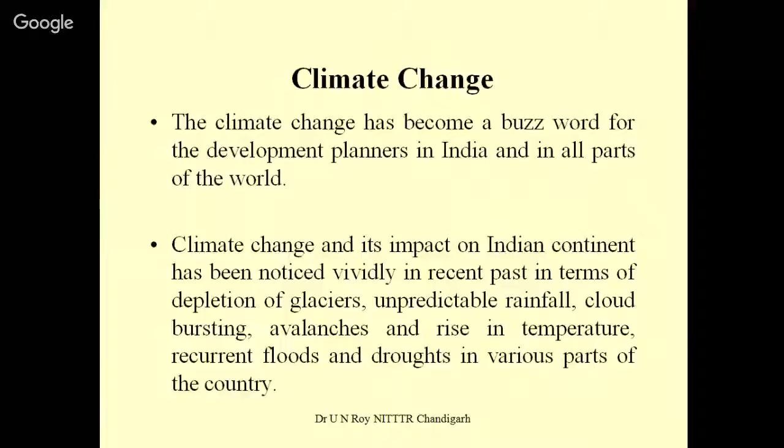And if climate change is there, then its various impacts are going to increase the frequency, intensity, and duration of droughts. All over the world this impact may be visible, and with this impact, so many sectors, particularly food, water, and energy, may face some crisis. We are passing through such crisis. And if there is climate change, it will have an inverse or bad impact on our food grain production. If the temperature increases, some crops may not grow. If the temperature goes down, some crops may be damaged. So such kind of situation is there.

Then water scarcity - as you know, most planners say the next world war will happen over water. Due to the scarcity of water, we are facing a lot of crisis, and similarly we have an energy crisis. This was projected by the Secretary General of the World Meteorological Organization a few years back. But what is the situation throughout the world?

There are two schools of thought. One group of geologists or environmentalists talk that global warming is taking place, and a second group of scientists say that global cooling is taking place. So who is correct - whether global warming is taking place or global cooling? Because the geological cycle takes millions of years into account, over the years, as per the geological cycle, there has been some period of global cooling and some period of global warming. This situation prevailed on the earth for years, and due to that cycle, some geologists still believe that after millions or thousands of years, once again global cooling will take place. But the people who believe in global cooling are very few in number.

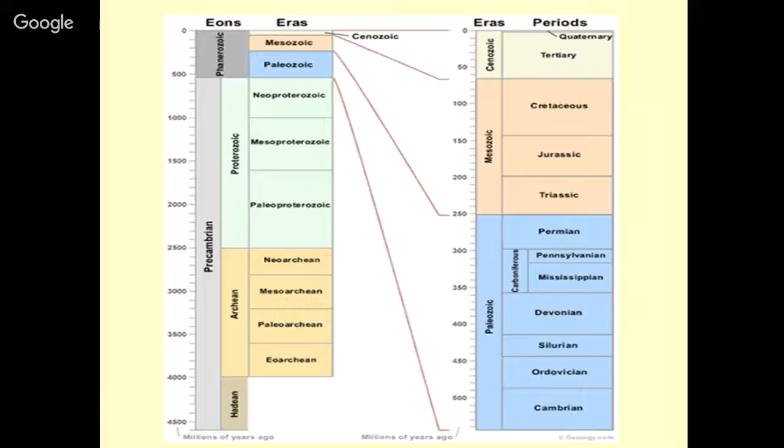So what was such situation? We have to learn about that. So geologists think in the millions of years of scale.

So you can see that 10,000 years ago, what was the situation? 1.8 million years ago, there was some different situation on the earth, and likewise the development or the evolution has taken place. So this evolution is important to learn, and there are various ages, and gradually different species, different plants and animals grew. They evolved gradually.

So earlier the microorganisms, small species were there. Gradually the bigger organisms, highest class of species and plants and animals came. And gradually such development has taken place on the earth, and it has a millions of years of scale.

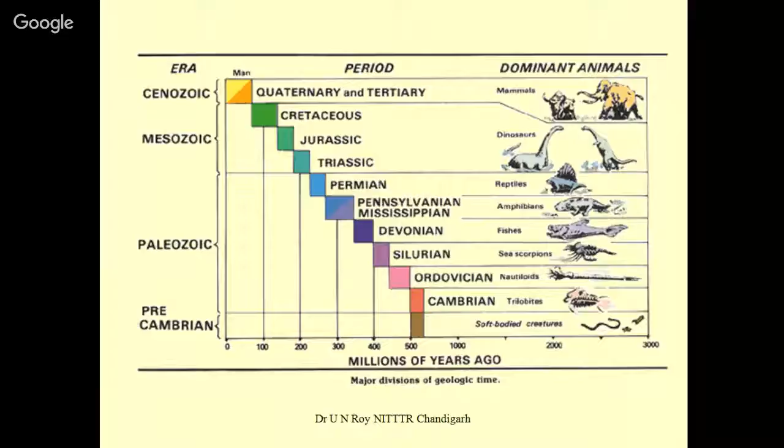That's why the geologists do not think that global warming is taking place, and they say we have to take the millions of years into account. So there may be a situation, maybe after 1 million years, once again there may be an ice age.

तो आप देखिए कि बीच बीच में ये ice age आते रहे हैं, इसलिए जियोलॉजिस्ट जब भी बात करेंगे तो कभी ये नहीं कहते कि भाई ग्लोबल वार्मिंग हो रही है। हो सकता है 1 मिलियन ईयर्स के बाद फिर से ग्लोबल कूलिंग हो जाएगी। अभी 20-25 दिन पहले आपने एक न्यूज पढ़ी होगी कि गंगोत्री के ग्लेशियर्स बढ़ गए हैं, so there may be a microclimatic change in that particular region, and the glaciers has increased, expanded। वहां पे आइस ज्यादा फॉर्म हुए। तो ये भी एक थॉट है जिसको आपको ध्यान में रखने की जरूरत है।

एंड देयर इज अ डिफरेंस बिटवीन क्लाइमेट एंड वेदर। क्लाइमेट जो है वो थाउजेंड्स ऑफ ईयर्स ऑफ स्केल पे डिपेंड करता है, वो लॉन्ग टर्म फेनोमेना है, एंड वेदर इज अ शॉर्ट टर्म फेनोमेना। तो हम जो मौसम की बात करते हैं वो वेदर की बात करते हैं, जो बीच बीच में डिस्टर्ब होता रहता है। व्हेनएवर वी टॉक अबाउट द टेम्परेचर, व्हेन वी टॉक अबाउट द रेनफॉल, हम बात करते हैं वेदर की, मौसम की बात करते हैं। लेकिन जलवायु की बात हम थाउजेंड्स ऑफ ईयर्स के स्केल में करेंगे। वे ग्रेजुअल चेंज है, ये 1-2 दिन की बात नहीं है। जैसे जैसे ये सिचुएशन चेंज होगी, पिछले 100 सालों में जो हमने गलतियां की हैं उसके कारण जो चेंज आएगा उसको हम क्लाइमेट चेंज कह सकते हैं, वेदर चेंज नहीं कहेंगे। वेदर चेंज इज द शॉर्ट फेनोमेना, 15-20 दिनों में, 50 दिनों में जो भी डेवलपमेंट हो रही है उसको हम वेदर से रिलेटेड डेवलपमेंट कहेंगे। सो वी कैन अंडरस्टैंड देयर इज अ डिफरेंस बिटवीन क्लाइमेट एंड वेदर।

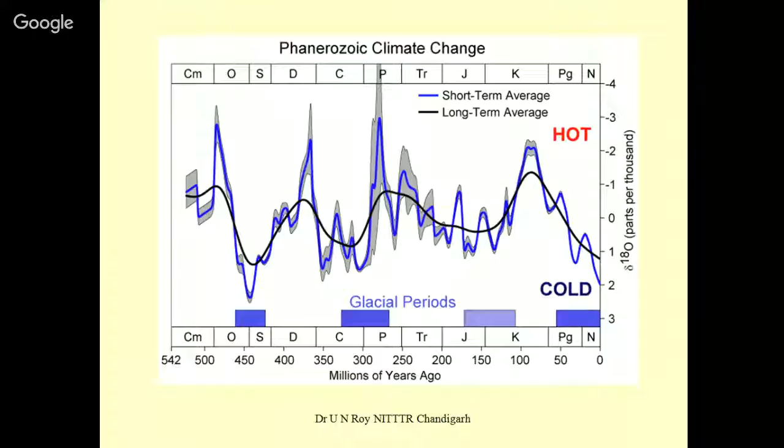सो व्हाट आर द कॉजेज ऑफ ग्लोबल वार्मिंग? एवरीबॉडी नोज, इवन आवर चिल्ड्रन नोज व्हाट वी हैव बीन डूइंग। हमने पूरे ग्लोब पर तरह तरह की डेवलपमेंट की एक्टिविटीज की। हमने जंगलों को काटा, हमने रोड बना दिए, हमने इंडस्ट्रीज खड़े कर दिए, हमने तरह तरह की पोल्यूशन व्हीकल्स ले आए। So with the development, pollution level is also increasing. So side by side, pollution graph is also going up, and similarly the graph of the pollution is also increasing.

So due to anthropogenic activities, anthropogenic means created by humans, done by humans, such anthropogenic activities are contributing to global disturbance, to increase in temperature. So major cause for such changes are anthropogenic. We human beings on the planet earth are responsible for this. Whatever development has taken place, it is all at the cost of natural degradation. So we should know what kind of damage we are doing, whether we are going to develop any machinery, any development activity, whether we are going to construct a dam, we have to damage some part of the nature, we have to use some part of natural resources. So due to all such activities in the last 1 century, lot of changes has been made, and these changes are contributing to global warming.

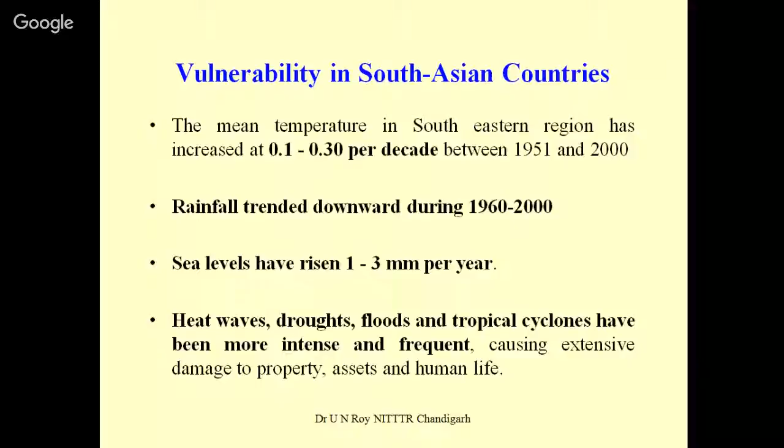So in some parts we are facing heat waves, droughts, floods and tropical cyclones. That kind of feature may become a regular feature in South Asian countries. As you know, we are surrounded by the sea from 3 sides, so we face all the problems in the sea region, and sometimes we have cyclones, tropical cyclones. They create problems and may cause damage to our property, assets and human life, what we call disaster. So vulnerability in South Asian countries is more.

It has been projected that between 1990 and 2100, the annual mean temperature is projected to rise by 4.8 degrees centigrade. Can you imagine, by 2100 if it goes up to 4.8 degrees centigrade, then what will happen? A lot of glaciers will melt down, and countries like Maldives, Kiribati, Norway, Sweden, Japan, and even some parts of our country will get submerged into the sea.

Sea level will rise, meaning many parts, many islands, small islands, are going to be submerged. Like Maldives, it is a very, very vulnerable group of islands, so the people from there may be evacuated.

There is a small island in the Pacific Ocean named Kiribati. The highest point on that particular land is 8 meters, so it's a very, very flat island located in the Pacific Sea, and it is very vulnerable. There are about 1 lakh population in that country, and it has been decided that they are going to be rehabilitated, evacuated from this place, and resettled in Australia and some nearby countries. That kind of situation is already prevailing.

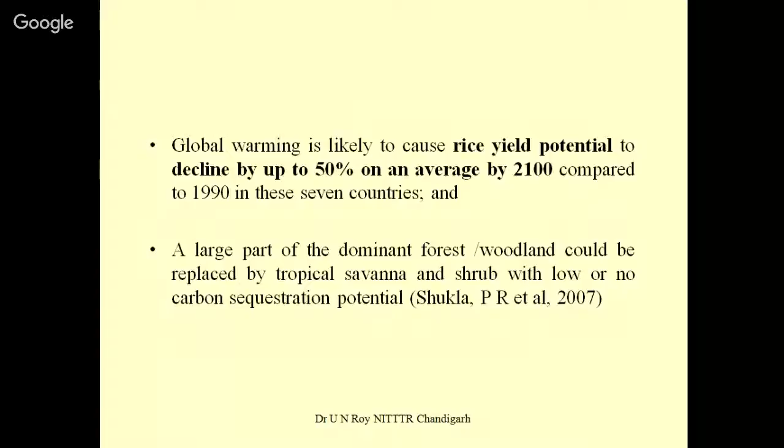In India, what kind of problems are we facing? We have a problem of earthquakes in 60% of our land mass. Then there may be a flood in 40 million hectares of our land.

Then the drought situation is prevailing in 68%. So you can see drought is the major problem in the southern part, central part, and eastern and western part as well. So drought is the major common feature across the whole country.

The second important problem is the earthquake. 60% of our land mass is prone to earthquakes. But some of the earthquakes which are devastating in nature may be above 5 or above 6 on the Richter scale. But you know, on the earth, there may be thousands of earthquakes taking place every day.

Those which are of damaging nature, more than 6 on the Richter scale, are very few in number. They occur 1 or 2 in a year, or maybe 5 or 6 in a year throughout the globe, and some go for even more than 8. So earthquakes are a very, very common feature.

Every day, thousands of earthquakes take place inside the earth, but they are not visible. We are not able to gauge them because they are of very low intensity.

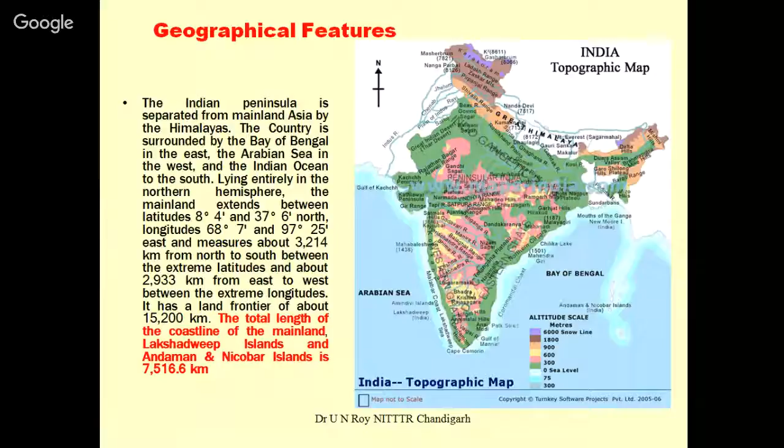हिंदुस्तान में 2004 तक कोई बड़ी प्लानिंग नहीं थी, लेकिन 2004 में जब सुनामी आई, तब हमने अपने laws develop किए। So now there is a 2005 Disaster Management Act that has been passed in the country. Before that, we were not much worried, and we were not putting more attention to disaster management. But after 2005, we have developed a Disaster Management Act, a plan, and in 2016 we have a full plan for the next 15 years। अगले 15 साल के लिए हम लोगों ने एक डिजास्टर मैनेजमेंट प्लान बनाया है, उसके बारे में भी हम डिस्कस करेंगे।

Now I am going to debate an issue. Are Himalayan glaciers melting, or is the river like Ganga going to dry up after some years? क्या हमारी गंगा जैसी जो नदी है वो कुछ सालों में सूख जाएगी? So this is a debate, a question which I am going to deal with. Everybody talks about the glaciers melting, but whether it will result in the drying of the river like Ganga. The Ganga is a perennial river, as you know, सालों भर ये चलती है, सालों भर इसमें पानी होता है। They are perennial in nature. But the question is that some scientists or some people are raising this issue of whether Ganga will dry or not. What is going to happen?

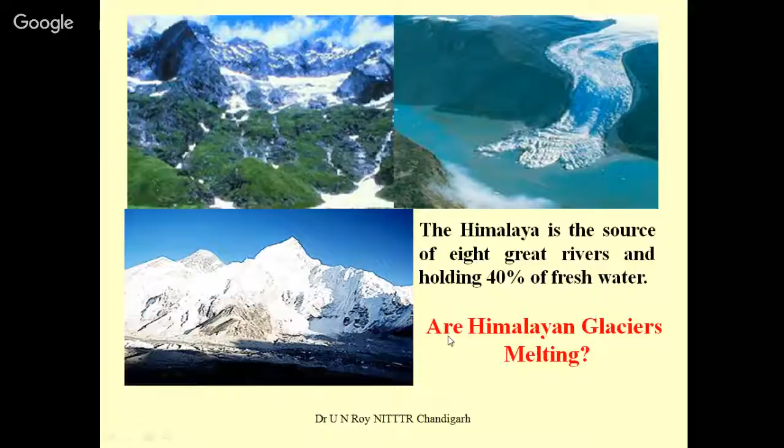So now let us talk about whether the Himalayan glaciers are melting. So can you see the figures? They all show that glaciers are melting. So the answer is yes, all such glaciers are melting, their size is decreasing, or in another term, we say it is retreating, going back and back. It is only visible on the top of the mountains now; earlier it was visible even below the mountains. Gradually, due to the decline or melting of glaciers caused by the increase in temperature, these glaciers have melted and are melting. So it will have some impact on the perennial rivers.

So glaciers are melting. Various studies conducted on the glaciers also suggest that most of them are melting. In one study conducted between 1980 and 1990, they took a sample of 612 glaciers. How many glaciers are there in the Himalayan and Tibetan regions, China and Indian regions? There are about 20,000 small and bigger glaciers. So this study, with a sample of 612 glaciers, suggested that 95% of such glaciers were found melting, found decreasing. A similar study conducted between 1990 and 2005 also reported that in 95% of cases glaciers are melting। तो एक बात साफ नजर आती है कि ग्लेशियर्स मेल्ट कर रहे हैं और डिफरेंट स्टडीज इसको सजेस्ट कर रही हैं।

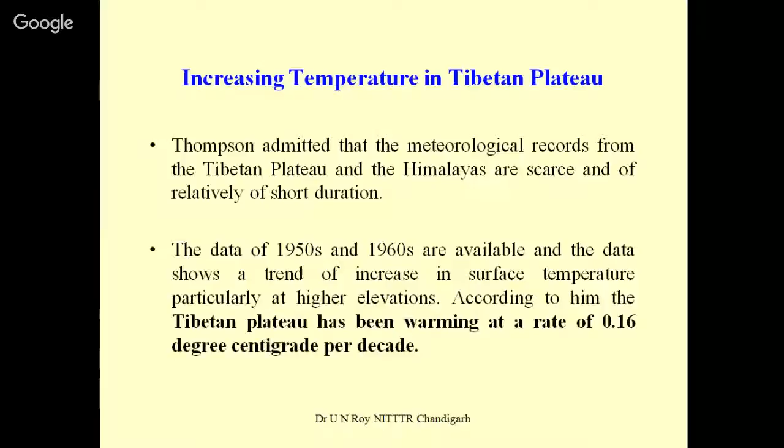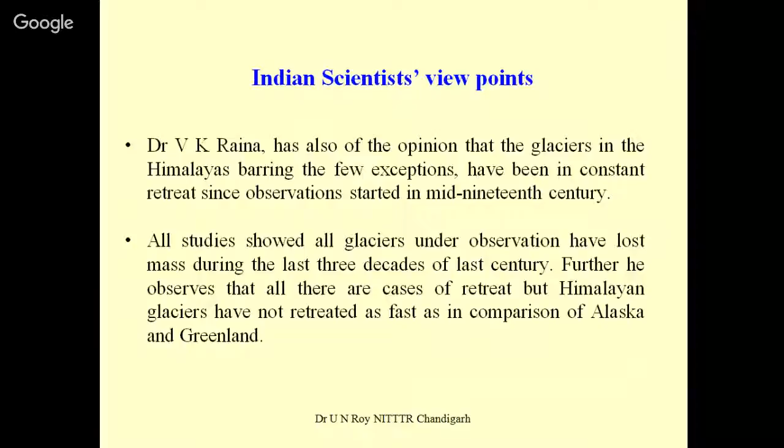As I was talking about, there are about 20,000 glaciers in India, China and the upper Himalayan regions, and most reports say that glaciers are melting. A number of scholars who have studied problems related to glaciers suggest that the glaciers are really melting - that is the conclusion. So let us conclude that most of these things are there. But I raised the issue of whether the river Ganga is going to dry up if the glaciers are melting.

What do you say? Let me ask this question to our students sitting in the studio. What do you say - will the Ganga dry up after some time if the glaciers are melting at a very fast rate? What will happen? What do you think on the other side also? Will the Ganga dry up?

According to study, it says... most of our participants say that the Ganga may dry up, based on what we see of the rate of depletion of glaciers. So according to that rate, the Ganga may get dried. But some scientists have concluded, based on some studies, that the contribution of Ganga water is more from the rain.

70 to 75% of the water coming into the river Ganga is from rain, from the different bigger catchment areas in the Himalayas. So all the rain water makes it more perennial in comparison to the ice water or glacier water. So it was concluded, based on that study, that still 75% or 70% of the contribution will come from the rain.

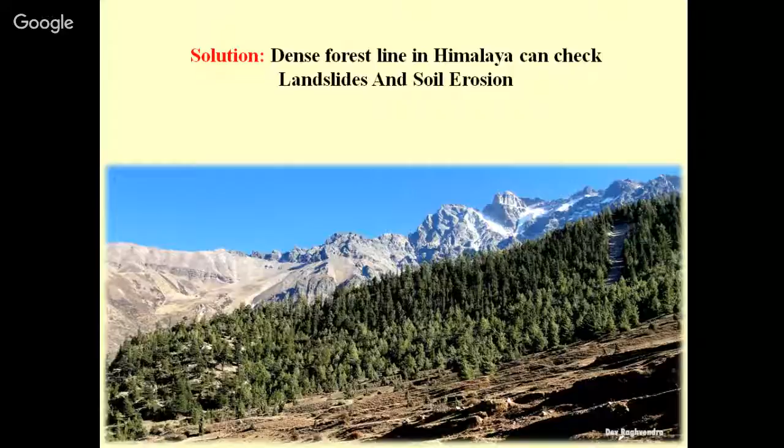एंड ही हैज डेवलप्ड अ मिक्स्ड फॉरेस्ट इन हिज विलेज इटसेल्फ. तो उनसे हम सुनेंगे कि फॉरेस्ट को बचाना कितना जरूरी है अगर हम ग्लेशियर्स को बचाना चाहते हैं. सो दे आर वर्किंग एज अ सेफ्टी बेल्ट. तो ये बात हमें समझने की जरूरत है.

So there will be a lot of problems if this continues, and due to climate change the food security issue will be the major issue. फूड सिक्योरिटी की सबसे भारी समस्या हमारे पास आएगी और 75% एरिया में फूड क्रॉप्स कुछ ना कुछ तरह से अफेक्टेड होंगे, और इसपे सबसे बड़ा चैलेंज फार्मर्स को झेलना पड़ेगा. फार्मर्स आर गोइंग टू बी मोर अफेक्टेड ड्यू टू द क्लाइमेट चेंज एंड फूड सिक्योरिटी प्रॉब्लम होने वाली है. और पिछले 100 सालों में जितनी भी क्रॉप्स थे हमारे पास, धीरे धीरे 5-6 छोड़कर

75% जो फूड क्रॉप्स थे सब खत्म कर दिए. ओनली वी आर डिपेंडेंट ऑन फ्यू क्रॉप्स दीस डेज - ओनली राइस, पोटैटो, मेज, व्हीट. So only a few crops are available. Other crops have been damaged due to modern agriculture. We have stopped growing small crops like millets, oil seeds, and all such crops we have lost.

अब अगर गांव में आप फार्मर्स के पास जाएंगे, उनके पास बीज ही नहीं है क्योंकि वो धीरे धीरे बाहरी दुनिया पे डिपेंडेंट हो गए. पहले वो बीज खुद तैयार करके रखते थे, अब धीरे धीरे उनके पास सारे बीज खत्म हैं. सो दैट इज अ मेजर प्रॉब्लम विच द फार्मर्स आर गोइंग टू फेस.

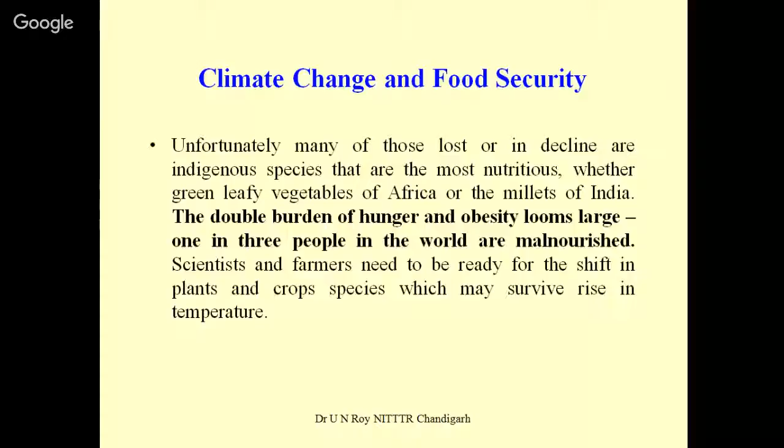Food crisis may occur, so it will change to hunger and obesity. And India is facing two kinds of problems. शहरों में 1/3 लोग खा कर इतने मोटे हैं, they are facing obesity. They are facing another problem - or 1/4 of our population, 25%, they are facing the problem of hunger and all such things. So this is the situation prevailing in our country.

Now, in order to mitigate the climate change issue, Government of India has set up 8 missions. हिंदुस्तान ने क्लाइमेट चेंज को टैकल करने के लिए जून 2008 में 8 मिशन बनाए हैं. क्या क्या मिशन है? First is the National Solar Mission - let us go for more and more renewable energy resources. Our Prime Minister has advocated a lot, and many solar power plants are coming in Gujarat, Rajasthan, Maharashtra, and various other parts of the country. So national solar mission is one.

Second is the National Mission on Enhanced Energy Efficiency. So we have to make all our technology energy efficient. Gradually we are taking various measures - CFL bulbs have come, LED and small equipment has come which is less energy intensive; earlier it was high energy intensive. So we are trying to save energy by making it more efficient. Even in thermal power plants there is a loss - from the thermal power plant, when electricity comes to different houses and localities, about 30% loss is there. So can we minimize such losses?

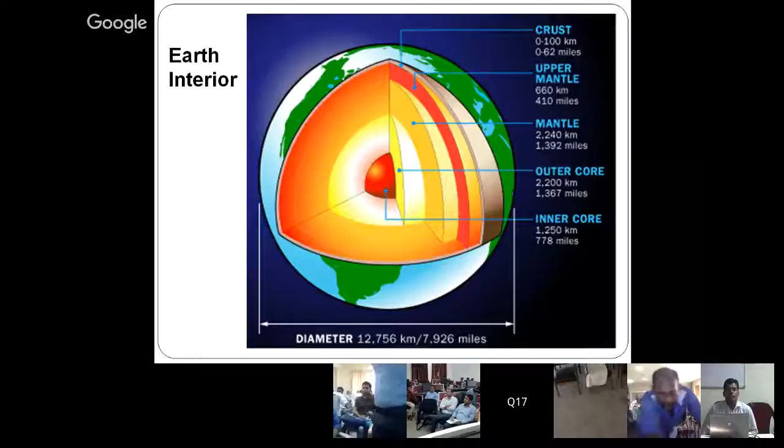So first, this is the Earth's interior look. As of now, if you look at the Earth exteriorly, we can say our Earth is simple and unique, and integrated with each other, right? That's perfectly right. But when you look at the interior part of the Earth, you can see the inner core, outer core, mantle, upper mantle, and crust. Crust is the region where we actually are. The inner core is in solid form, and the outer core is in liquid form. The remaining parts are composed of sand and rocks.

So at the crust, Earth has 4 major layers: inner core, outer core, mantle, and crust. Crust is the region where we actually are. The crust and the top of the mantle make up the thin skin on the surface of the planet. This skin is known as tectonic plates. Tectonic plates are nothing but a plate-like form made of rock materials—directly, it's rocky material. Just imagine below the mantle, exactly near the mantle, we have many rocky surfaces. Like when you have water and you float leaves on it, how they float—similarly, these tectonic plates exist on our Earth's surface, exactly below the mantle surface.

These tectonic plates are not continuous plates. Before 1900, we used to think these tectonic plates were continuous. But later, after 1920 and after 1960, we finally concluded in the year 1960 that these tectonic plates are not continuous plates—they are broken plates. Broken plates means it's not a continuous plate, it is broken. Just imagine when you have a cup of water with many broken leaves floating on it—they are not in an ideal fixed position. The same kind of thing is happening internally on the Earth's surface.

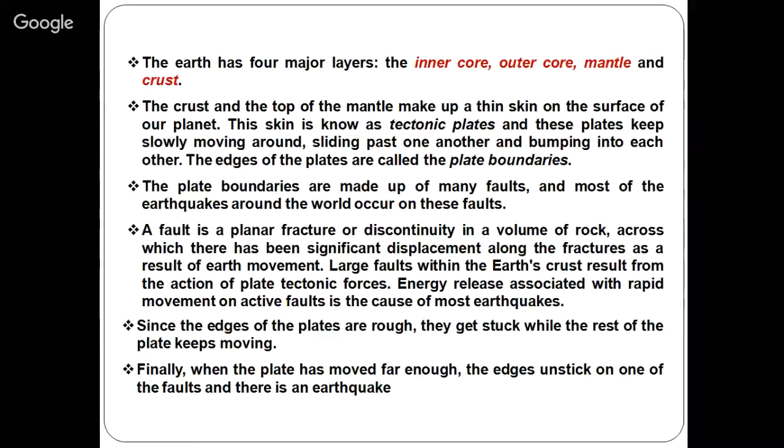That's why it is generally referred to as one of the very active seismic regions. That particular Himalayan region is generally referred to as a very active earthquake region. That's why we used to have many earthquakes in those regions, because when 2 plates are merging or colliding with each other, we can expect some earthquakes.

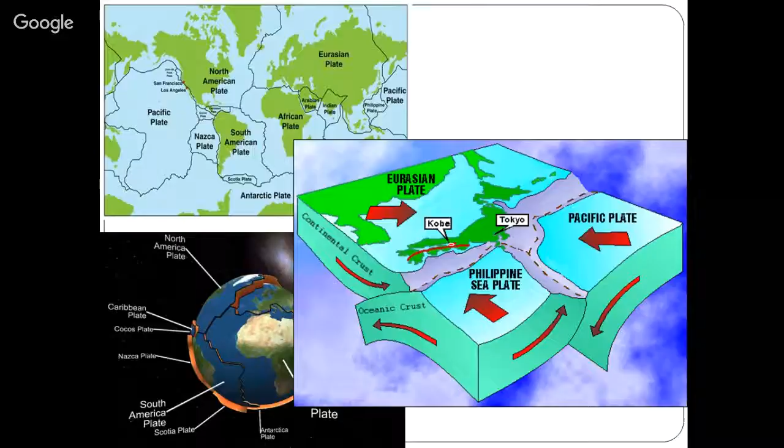Earthquake. It's not a bad thing, first of all. It's a very good one. It's nothing but the releasing of sudden energy.

Humans are living on the crust, which is the uppermost part of the Earth. So we think that earthquakes will kill us. No, an earthquake is not going to kill you or me. The building which we are constructing on the earth's surface will kill us. So we have to construct our buildings to be earthquake resistant, so that we can resist a certain amount of earthquake using modern advanced techniques and easily survive during an earthquake.

So an earthquake basically, as I told you, happens when 2 tectonic plates hit each other, and there you can expect a certain amount of vibration. This vibration is released in the form of energy, because tectonic plates are rocky materials, and rocky material is an elastic material. These elastic materials store elastic energy internally. When 2 plates hit each other, this stored elastic energy comes out from the surface, from the internal part of the Earth.

That point is generally referred to as the focus. Tectonic plates are rocky surfaces, but they're not always rigid. In some parts of the rocky surface, we can expect a certain amount of discontinuity in the continuous mass. This discontinuity is generally referred to as a fault, which is the weakest part of any tectonic plate. So when an earthquake occurs, we can expect it exactly in the fault region.

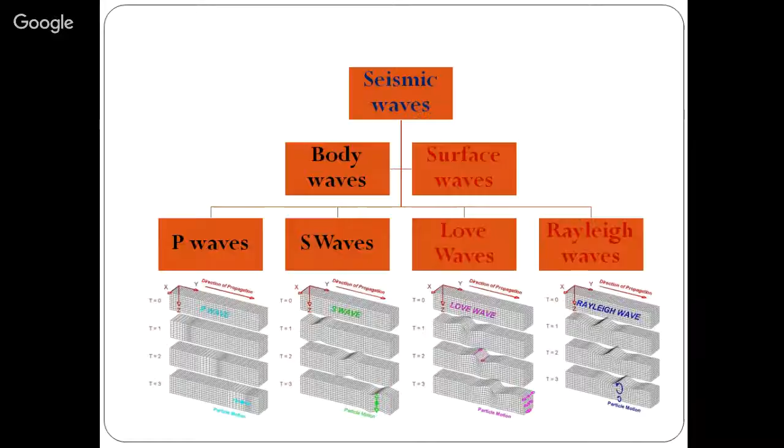These two waves are very strong waves compared with body waves, because body waves easily dissipate, but love waves and Rayleigh waves travel on the surface of the earth. That's why these two waves are the major source of disaster on the surface of the earth, whereas body waves are not. You can see the first picture stands for the primary wave or P wave. This will travel like this.

No, it will travel on the surface only, not in the internal part, only on the surface. That is the harmful one, yes. Love wave and Rayleigh wave are the harmful waves.

The next one, B, you can see the secondary waves. When you have a rope and you play with it like this, the rope travels in a wave form. This is the way S waves travel at the Earth's surface. Internally, these are the interior waves, the body waves.

Whereas in C, it travels in a zigzag form, and in D, it travels in a wave form plus it squeezes. That's why the Rayleigh wave is one of the strongest and most disastrous waves, creating huge disaster on the surface compared with any other waves. Primary waves are the fastest wave, but the Rayleigh wave is one of the strongest waves which create huge disaster on the surface.

So how do we measure these things? We have two different kinds of measurement for earthquakes: one is magnitude, another is intensity. Magnitude is measured in terms of the Richter scale, whereas intensity is measured in terms of the modified Mercalli intensity scale. There are two different scales we have. So what is magnitude actually?

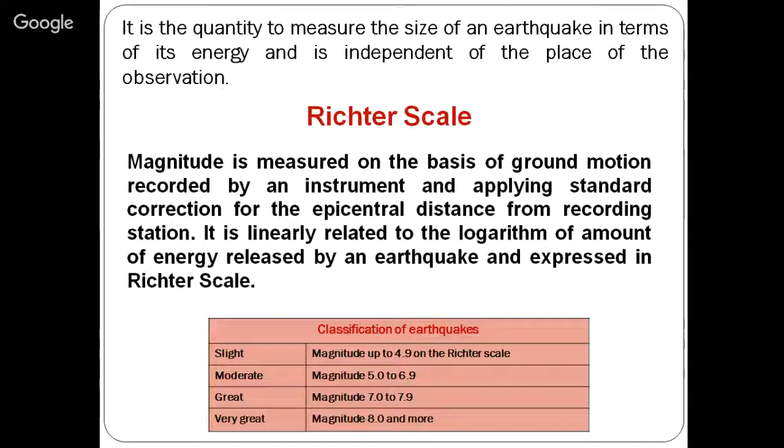Now let us see the Modified Mercalli scale, which talks about intensity. What is intensity? It is nothing but the amount of disaster we face. When an earthquake occurs exactly in Chandigarh, the buildings constructed on the earth's surface there will be collapsed or damaged. This damage level is the intensity - the amount of disaster, the damaged portions, and how the structure is damaged.

According to these damage levels, we have created a scale generally referred to as the Modified Mercalli Intensity scale, or MMI scale, ranging from 1 to 12. 1 stands for not felt by people, whereas 12 stands for huge or total damage. So if an earthquake occurs at Chandigarh with magnitude 7, even measured in America the magnitude remains 7 - it doesn't change, but the intensity will differ. In America the intensity might be 1, whereas in Chandigarh the intensity could be 12. That is the difference between intensity and magnitude.

What is the difference between zone and grade? Grade is nothing but a scale - grade number 1, grade number 2, grade number 3, like scale 1, 2, 3, 4, ranging from 1 to 12. Zone is completely different from that.

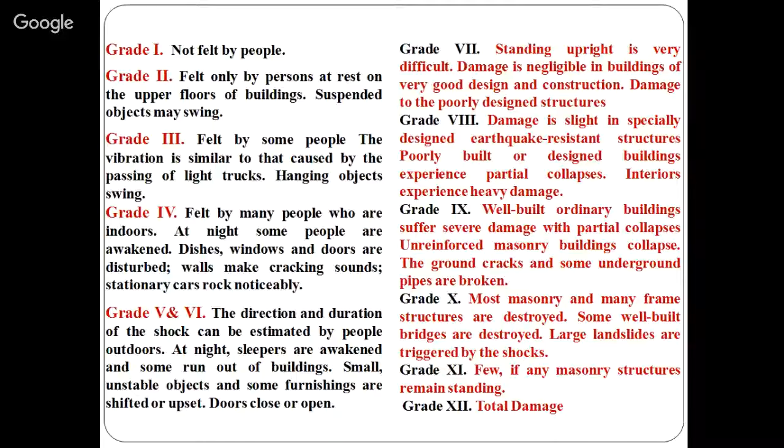Seismographs are among the oldest equipment used to monitor or observe the amount of earthquake energy released, in terms of acceleration, velocity, or displacement. Right now we have very advanced equipment, which is the same concept but in an advanced form - instead of the weight and pen, we have an automatic pen that is always moving, with a rotating drum at the bottom.

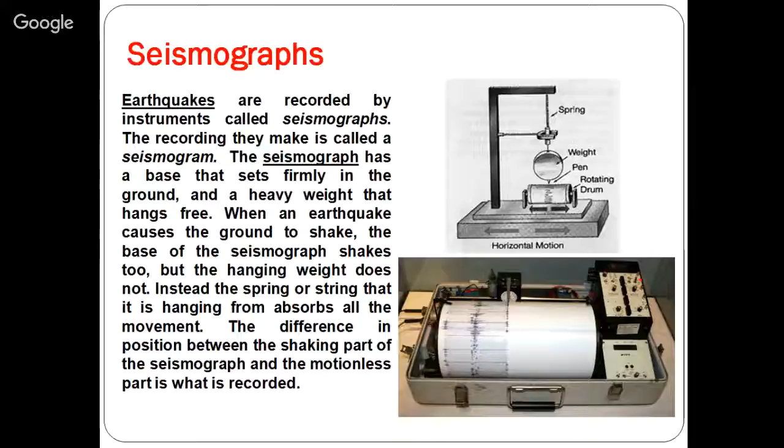Now, even this machine is not commonly used anymore. We have accelerographs that directly record the acceleration, velocity, or displacement of a particular earthquake. With the older machines, we had to get the graph separately and analyze it, whereas in the recent advanced equipment, we can easily measure acceleration, velocity, or displacement directly during an earthquake.

Seismic stations will not be on the Earth's surface; they will be 10, 20, or 30 feet below the surface, because this equipment is very sensitive. Even if you speak, jump, or travel with a vehicle on the surface, it will record all the vibrations. That's why we keep seismic stations below the ground surface.

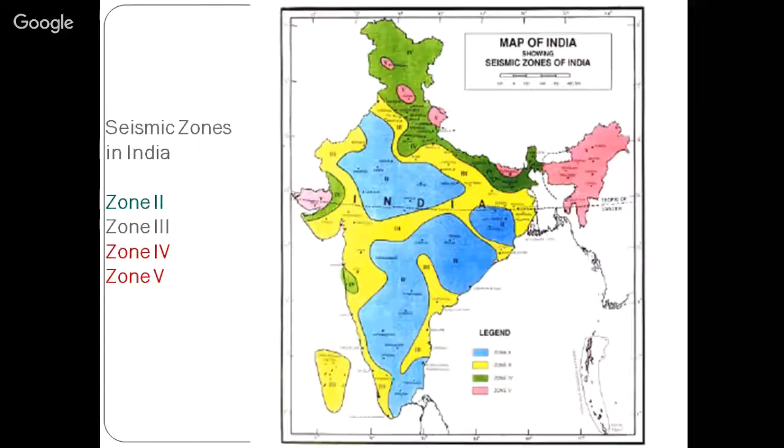What are the effects of earthquakes? You can expect landslides, surface faulting, tsunamis, liquefaction, and flash floods. If an earthquake occurs on the surface, we call that an earthquake. If it occurs below the sea, that is generally referred to as a tsunami.

An earthquake is nothing but a sudden release of energy. If that sudden release of energy happens below the ocean, the water present on the sea surface has to absorb the energy and dissipate it, and that happens exactly at sea level. At the midpoint of the sea, the depth is very large compared to the shore level, which is why there's no sign of wave movement during an earthquake occurring below the sea surface.

The tsunami will create huge disaster exactly at the shore level, not at the internal level, because the depth in the sea in the middle is much larger compared with the shore level. That's why the shore level depth is not sufficient to hold the energy released during an earthquake. That's why it dissipates like this, and we can expect tidal waves up to 10-meter or 20-meter height. That is nothing but the stored energy, released energy. The wave is traveling, the tidal waves travel to a height of 10 or 20 meters - but actually the waves themselves are not traveling that far; it's the released energy causing the tidal wave to rise to that height.

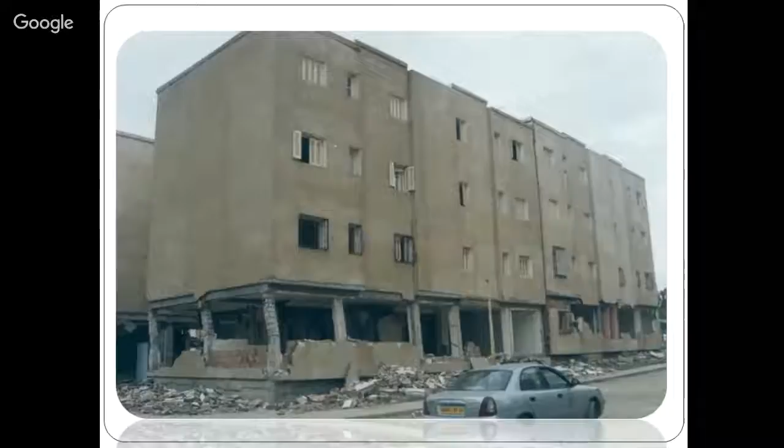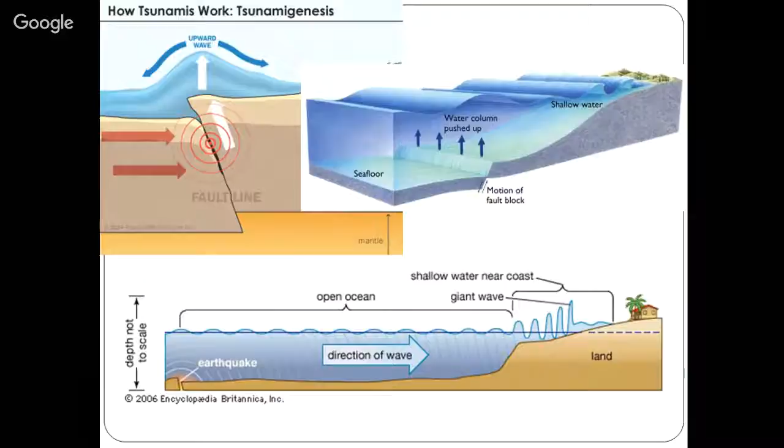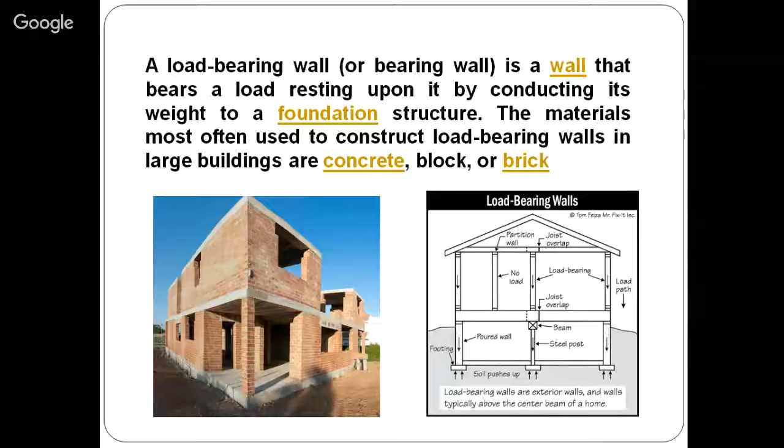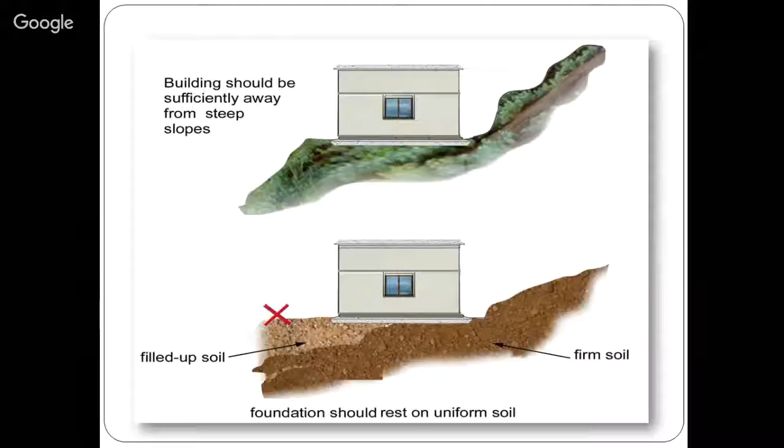So what are the things we can do? Earthquake resistant measures at the planning stage. It should start from the planning stage. If you have a solid surface, we can execute the construction immediately from the foundation. Suppose your foundation level is not solid, and you are filling with soil, filled up soil, then our foundation should not be on the filled up soil. The reason is an existing firm soil has very good consolidation compared with filled up soil, so you can't match the consolidation level of firm soil using filled up soil. In such circumstances, you can go for raft or pile foundations, because we need pile foundation only in filled up soil, whereas in firm soil the consolidation level is already good, so there is no need for extra consolidation or pile construction.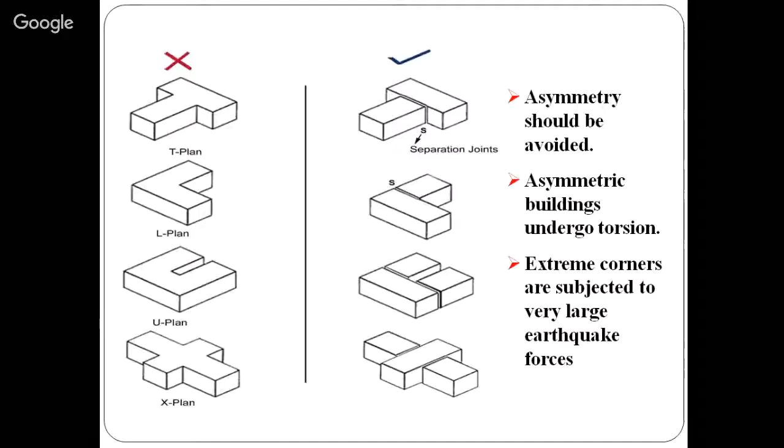The reason is, if you take two stainless steel scales and keep them touching each other, and try to vibrate it, what will happen? One steel scale will touch the other. What does it mean? The effect of one will create an effect on the other. So when you have two different buildings, we should have a proper gap between them. What will happen during an earthquake? Both buildings will vibrate in their independent mode, so one vibration will not create any problem for the next building. That's why we have to have separation joints between any parts of the building.

If your building has no connection - the first image shows how it should not be, and the next one shows how it should be. When you have connection, the failure will occur exactly at the corner point. When you don't have any connection, both buildings will vibrate in their own mode. So this is how it should vibrate.

Next one is, we have water - can you just give me that.

So you can see this example. This is the water can I have, and now even if I vibrate the table, the water can is going to be in ideal condition. The internal liquid in the water can is vibrating. Even the entire water can is also vibrating, but it is not falling down. The reason is the base is very solid, whereas the top has a narrower portion. That's why it is not falling down.

Suppose if I keep it like this, the base is very small as compared with the top. Now, even if I apply small vibration, the entire water can collapses. Okay.

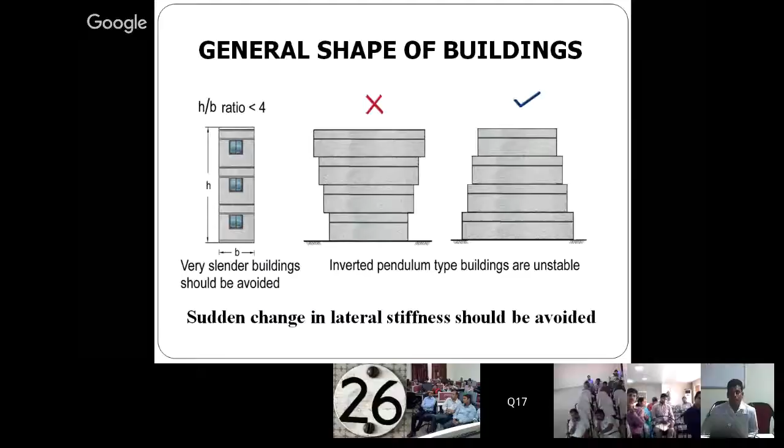PPT. See this case. That's why our earthquake resistant design philosophy says that the foundation width should be higher than the top width, so that it can easily resist any kind of earthquake. So plan-wise, we have to make our building so safe, and elevation-wise, we have to make our building so safe.

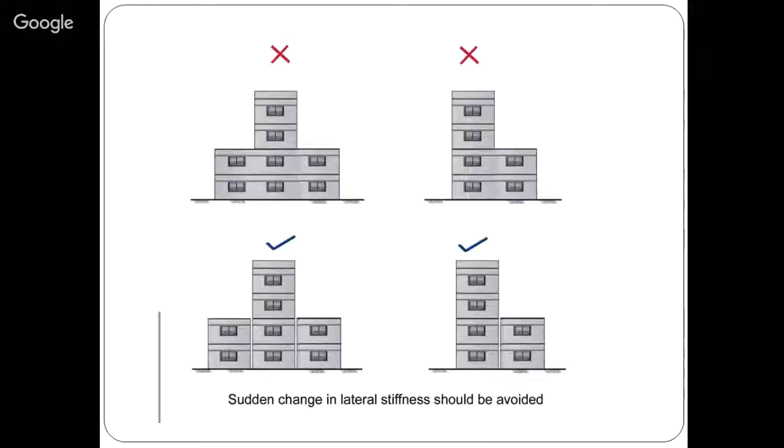If we have different height buildings, again we have to make proper separation joints. Otherwise, the vibration of one part will create adverse effect on the other. And we should not have any suspended things or any external projection like cantilever.

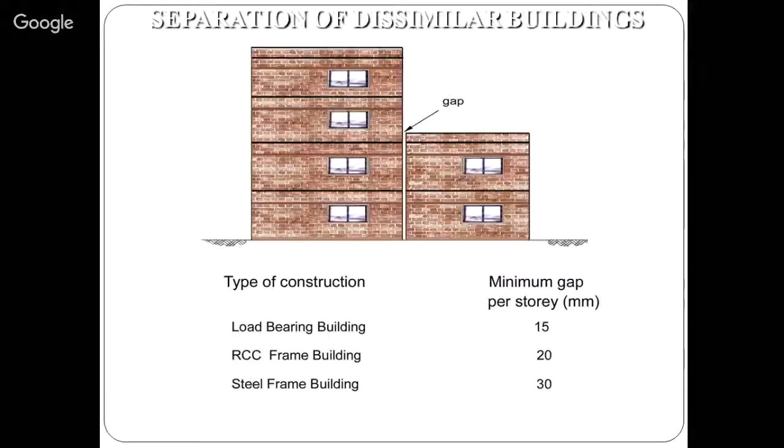So this is the recommended gap between two buildings in masonry. Similarly, we have a recommended gap for our RCC buildings, which is perfectly defined in IS 1893-2002.

So what is liquefaction? I told you, the groundwater table is coming up. That's why we can expect certain amount of sudden settlement. This is a perfect example for this.

So in this case, we can't predict that liquefaction is going to happen below my building. In such circumstance, what we can do is construct our building using pile foundation or raft foundation. This is a perfect example for raft. So raft is nothing but our building going to be on the entire platform, on a single platform. So one side liquefaction or one side settlement is not going to affect the other part.

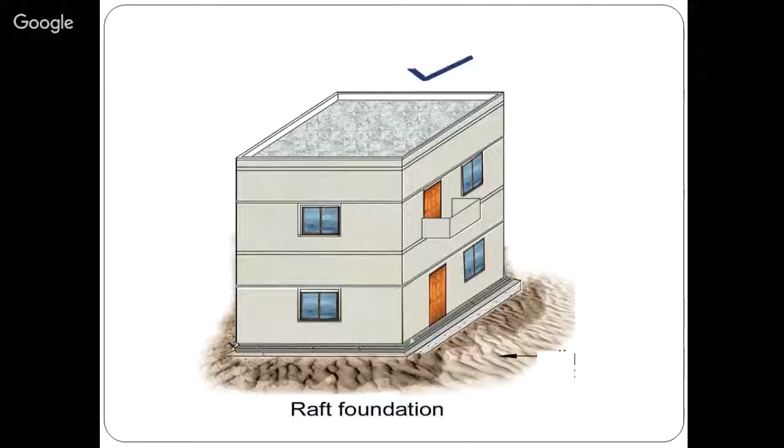So even if it settles, the entire building is going to settle perfectly in a similar way. The settlement is going to be uniform everywhere, so it's not going to create any harmful defect to my building. Or you can go for pile foundations.

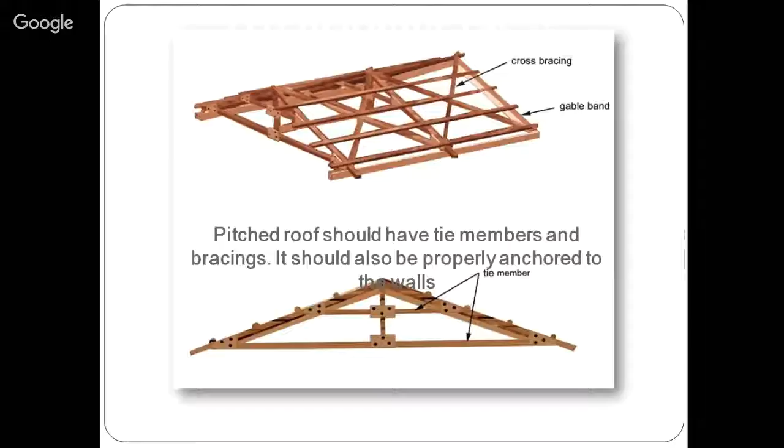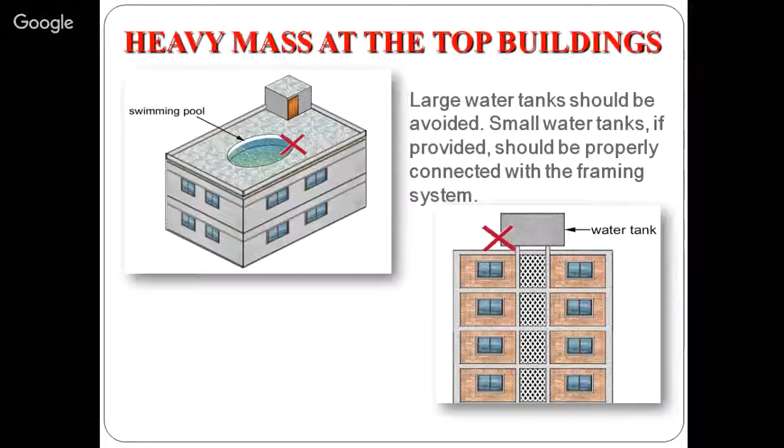Similarly, water tanks are one of the very important parts of the building, which supplies water, and at the same time one of the very crucial parts during an earthquake. It is again unsupported. When you are constructing a water tank along with your building, we have to follow certain procedures, otherwise it will create a sudden collapse at the top level, which will create huge stress on the stories below.

So masonry buildings are a perfect example of this. Masonry structures can resist any kind of compression load, but they are weak in tension. When you apply a tension force, the mortar joints are going to fail immediately. So our masonry structures are good in compression but weak in tension.

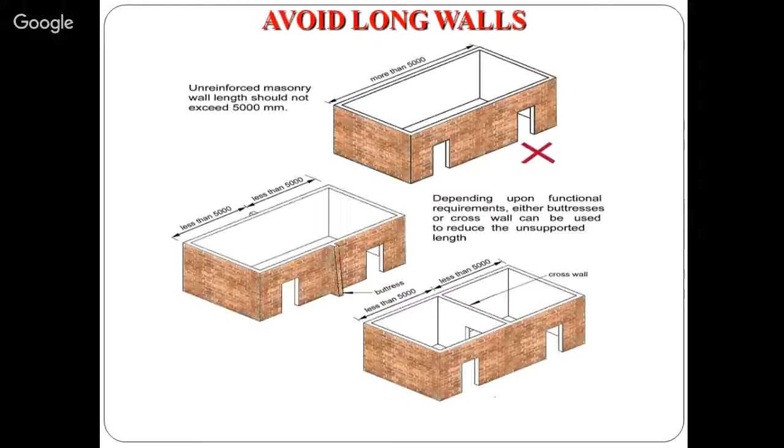This is not only applicable for brick masonry, it's perfectly applicable for stone masonry also. Stone masonry uses random rubble masonry rather than sized stones. In this case, the stones are not uniform in size like bricks, so we can't follow any English bond, Flemish bond, British bond, or any bond methods.

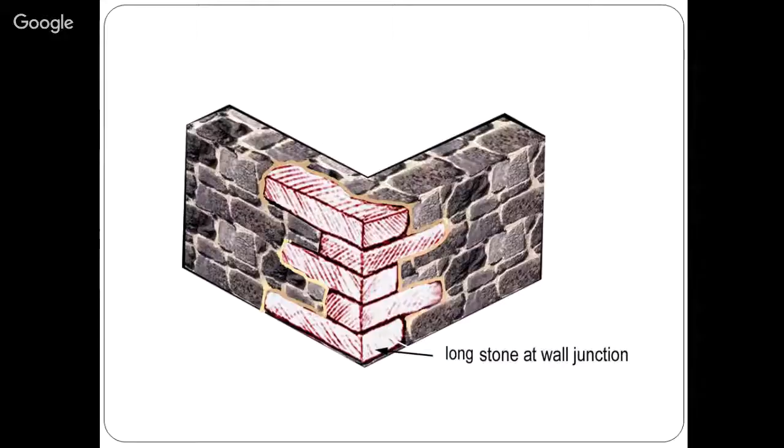This through stone methodology should be followed in the wall connections, because in the wall connections we have to maintain proper connectivity.

If you have a wall connected like this, what will happen? There is no perfect connection. So during an earthquake, this wall will fall, and this wall will also fall. But when you connect the wall properly like this, when an earthquake occurs, it can jointly resist the forces. That is why we have to go for through stones as defined in this picture.

Through stone is just one simple method. When constructing a masonry structure like this, we also have to go for bands. You might have seen small beam-like structures in masonry, generally referred to as lintels. In older construction, a long stone was placed over the door or window. The reason is that the wall above the window or door should not rest directly on the door frame or window frame, because these frames are not designed to resist such loads.

That's why we used to have a long stone. Nowadays we don't follow that; instead we use lintels. In lintels, we construct with small steel rods for a small depth along with plain concrete, jointly forming a reinforced concrete element.

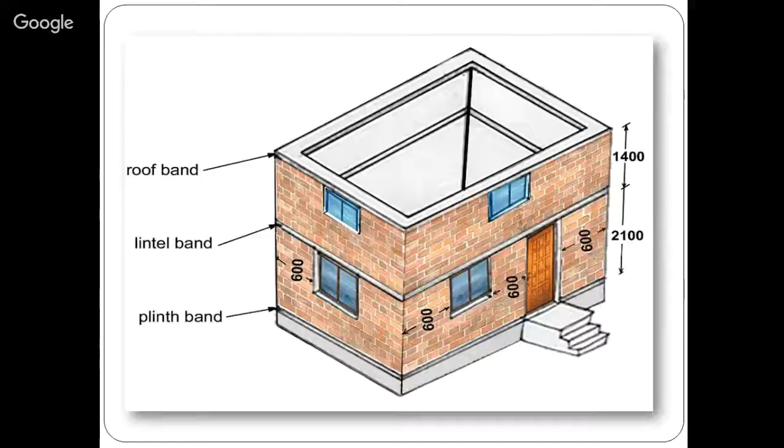Similar to lintels, we have to provide these kinds of structures at different levels: plinth level, lintel level, and roof level. These are generally referred to as bands—plinth band, lintel band, and roof band. What exactly is a band? I will show you in the next images.

Plus vertical reinforcement. Since this is a masonry structure and not an RCC building, vertical reinforcement doesn't mean 4 to 5 bars at a single corner—just one reinforcement at every corner and at every opening, wherever we have openings. As shown in this image, the corner has a vertical reinforcement, and exactly at the door and window openings we have vertical reinforcement. So this is the vertical reinforcement and band.

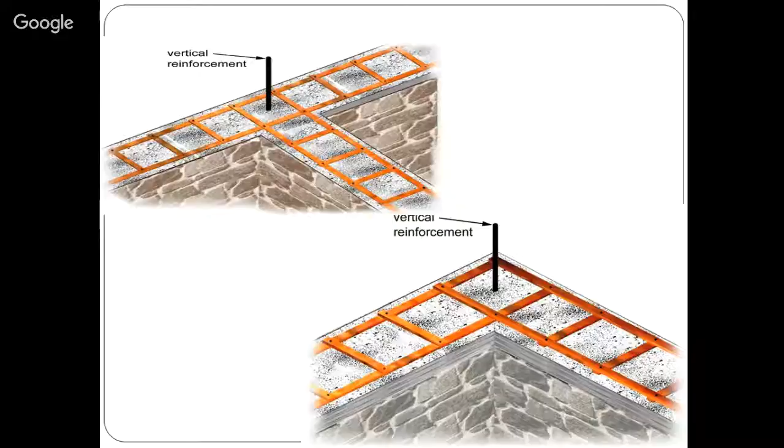Our IS code doesn't only recommend steel—it also recommends bamboo sticks or cane wood. You can use cane wood or bamboo sticks to make the band. This is how we make the band and vertical reinforcement. This vertical reinforcement perfectly interlinks the bands in the X and Y directions, creating integrity between them. This is how the reinforced concrete band works.

For a T connection, we have to follow the first procedure, and for a corner connection, we follow the second procedure. This is perfectly defined in the IS 4326 code book—you can refer to IS 4326 for earthquake resistant measures for masonry structures.

One interesting fact: a magnitude of 5.9 releases 31 times more energy than 4.9. An earthquake of magnitude 6.3 on the Richter scale releases an amount of energy equal to the atom bomb disaster that happened in Hiroshima and Nagasaki in the 1940s. Both are equal, a 6.3 magnitude earthquake is equal to an atom bomb failure.

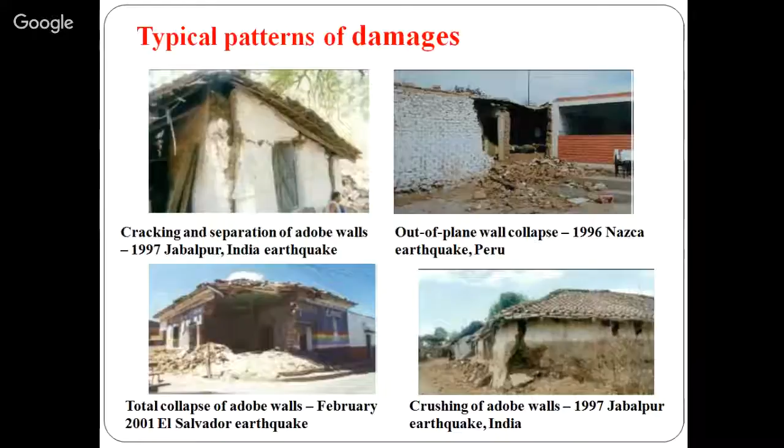What we are trying to develop in masonry structures is a box action. If you take a square or rectangular box and vibrate it on any platform, the entire box will move together. Suppose you create a dummy box using thermocol sheets or pads without perfect connections at the corners, and subject it to vibration - if the corners are perfectly connected, the box will resist vibration. If not perfectly connected, the box will not resist vibration. The connections will fail at the very initial stage, and the entire building will collapse.

So this is how it will behave during an earthquake. That's why we recommend corner stones at the corner levels. If you have perfect connections at the corners, the entire building will behave like a box.

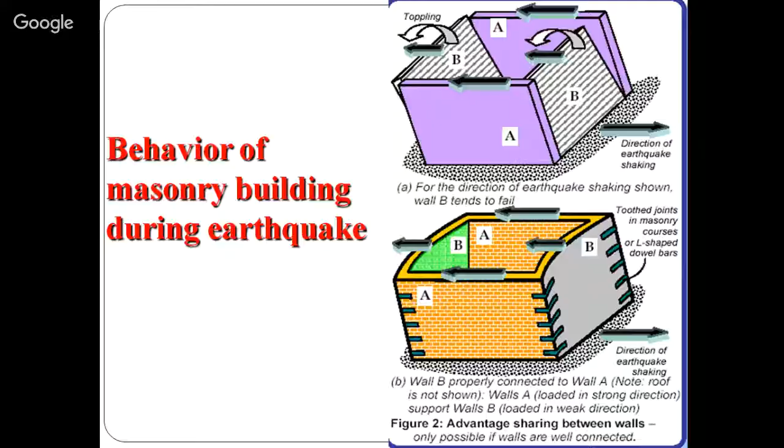Similarly, when constructing a staircase in any building, it should be separated from the main building, because staircase is a reinforced concrete element, whereas our masonry structure is not. So it should not have a perfect connection - there should be a proper gap between these two structures.

So when you have a masonry building, during an earthquake it will behave like this. To address this issue, we recommend different levels of bands - roof band, lintel band, plinth band, and sill level band if required, plus vertical reinforcement. When you have vertical reinforcement and bands, the building will deform gradually. This building will have damages during an earthquake - we are not saying it won't damage, it will damage, but it will not collapse. It will not kill you. The occupant will be perfectly safe during an earthquake.

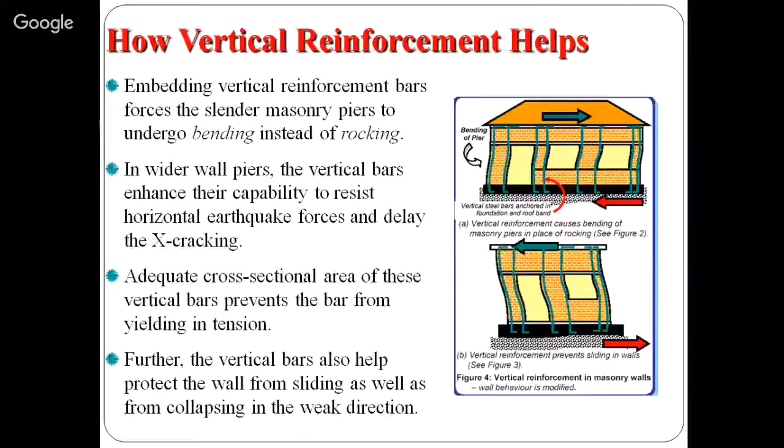So when you have open windows like this, exactly at the corner level, huge cracking will occur. This cracking will allow the entire building to collapse. When you have vertical reinforcement along with lintel band and sill band, these bands will perfectly connect and resist any lateral deformations.

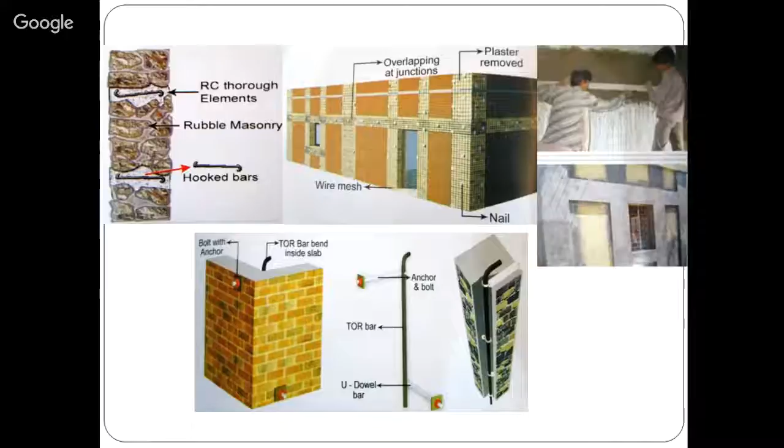Similarly, for masonry structure I mentioned we need vertical reinforcement at corners and openings, but in existing buildings a vertical reinforcement is very difficult. So we can go for wire mesh on both sides, internally and externally, connected by interlink steel wires. When you plaster the entire internal and external surface, it becomes an external reinforcement that will resist any kind of lateral deformation. This is how we upgrade an existing building to be earthquake resistant.

So far we have discussed earthquake resistant measures for masonry structures. Now let's look at earthquake resistant measures for RCC frame structures.

For a minor earthquake, consider this RCC reinforced concrete building with infill frame. The infill means brickwork - internally we have brick walls and the outer frame is RCC frame. So during a minor earthquake, we can see the internal brick walls are cracked.

Let us come to the moderate shaking. When the earthquake is at a moderate level, the crack occurred in the brick wall is creating stress exactly at the beam, exactly at the column connections. During severe earthquake, the brickwork creates huge distress to the beam as well as the beam-column elements.

Plus, the deformation occurring due to an earthquake is also exactly at the beam-column connections as well as in the foundation connection. That's why I told you at the very first stage that foundation-to-column connections and beam-to-column connections are very important, so that you can easily resist any kind of deformation with any kind of earthquake. Otherwise, the building is not going to deform.

Which means what? Take an example of a coconut tree and a banyan tree. During severe wind, a coconut tree can deform easily, and finally it will come back to its original position. When you come to a banyan tree, it is not going to deform - it will resist the wind force up to a certain limit, and after that it will completely fall down. It is not going to resist.

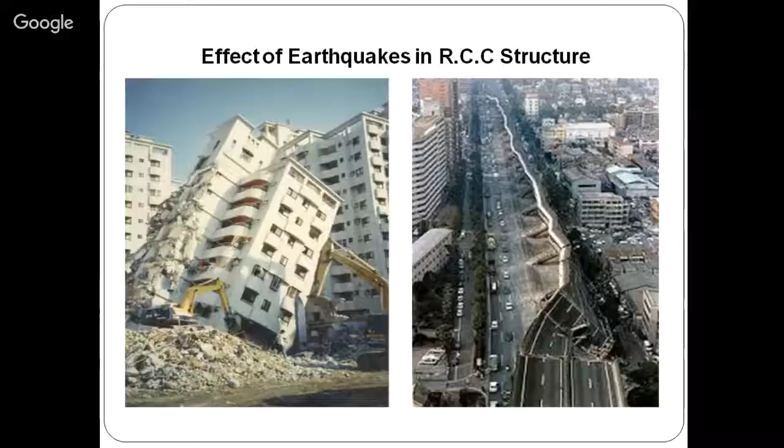The next one is a bridge failure during an earthquake. So see the first one, second one, third one - 1, 2, 3, 4, 5, 6. It is a 6-story building, but there is no column actually - all floors are resting one over another.

So what happened actually in this case? It was not perfectly designed. During an earthquake, these columns were not able to resist the deformation, so the columns failed. The entire one floor is resting on another floor - it's a 6 to 7-story building, perfectly packed like a burger.

See the other failures - these are all soft story failures. You can see the top story is still active, but the bottom story has failed.

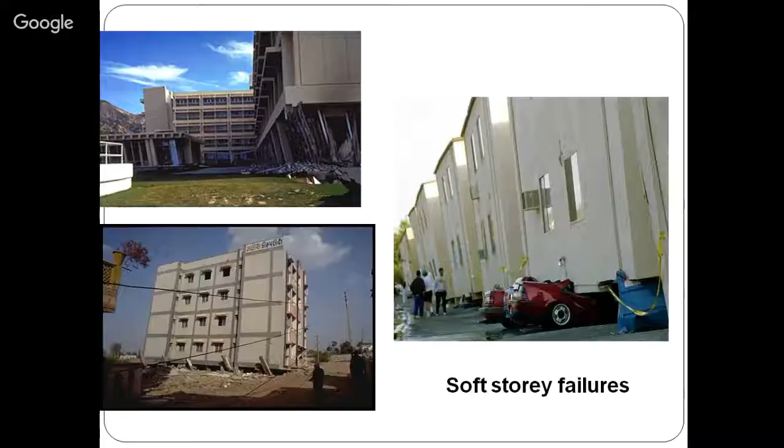So this is what they are expecting - the first one, hinges. A hinge is like the hinges you've seen in a door. When you open the door, you can open it; when you close the door, you can easily close it, because the door is perfectly connected with the door frame with the help of a hinge. If you don't have the hinge, you can't open or close the door.

The same kind of hinge formation should occur in the beam-column joint connection, as defined in the first one: A, location of potential plastic hinges. We are not going to construct actual hinges like in a door in the building frames, but we expect the entire frame, at that particular location, to behave like a hinge, so that the entire building can deform like this. Otherwise, what will happen?

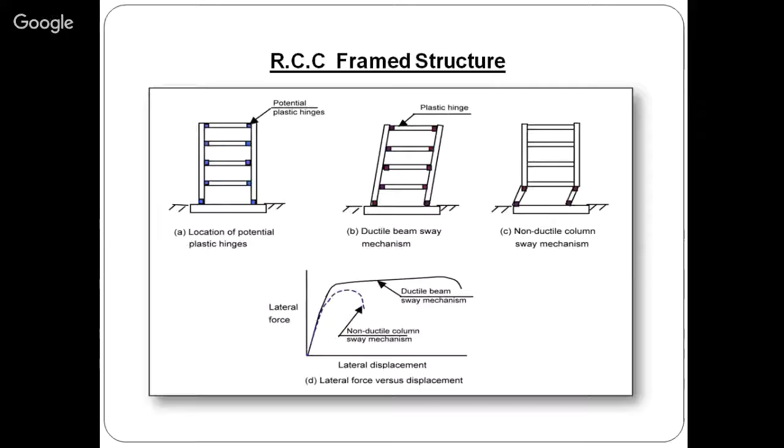So our building should behave like this. During this deformation, your beam column joint is going to be subjected to huge distress. So our beam column joint should be able to resist a large amount of deformation, a large amount of shear force transformation. So our beam column joint is one of the weakest and most critical parts of the building.

Beam column joints in your building, as you can see in this picture, the cornermost is generally referred to as exterior beam column joint, whereas the innermost is generally referred to as interior beam column joint, and the top corner is generally referred to as corner beam column joint, as defined in this picture. Interior, exterior, and corner.

So the stress transfer mechanism of the joint is very simple. All the loads, including those due to masonry walls, will transfer to the beam. The forces in the beam will transfer to the column through the joint, and finally reach the foundation. So all the forces are traveling from every independent member through the joint to the foundation.

So joint is one of the very important members in transferring all the forces. If the joint fails, we can expect a global failure. If the joint is not failing, then you can expect a localized failure. Localized failure means failure in any independent structural member, and global failure means the entire building collapses.

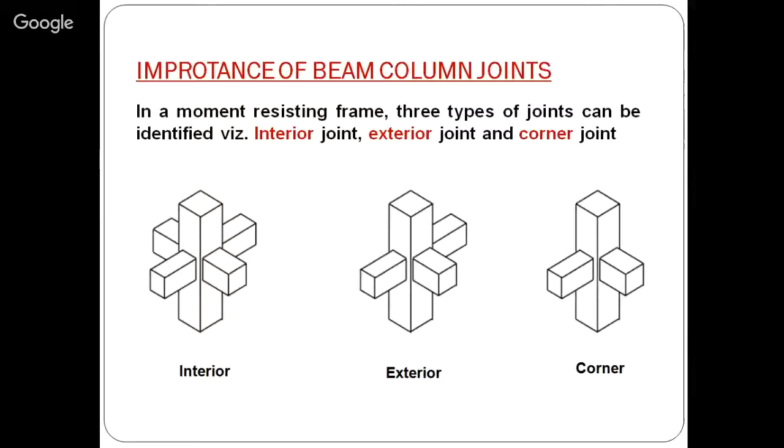So this is how the stress transfer mechanism happens. During deformation, during the ground vibration, our building is going to deform. I told you concrete is one of the very brittle materials, so immediately the tensile stress level is going to be higher, and immediately you can expect cracks at different levels.

These cracks will allow the reinforcement to slip from its original position. This creates huge shear stress concentration in the beam column joint as defined in this picture. This leads to collapse, shear collapse or shear failure in the joint. So these are the various shear failures of the joint at different levels: corner level, external level, and interior level.

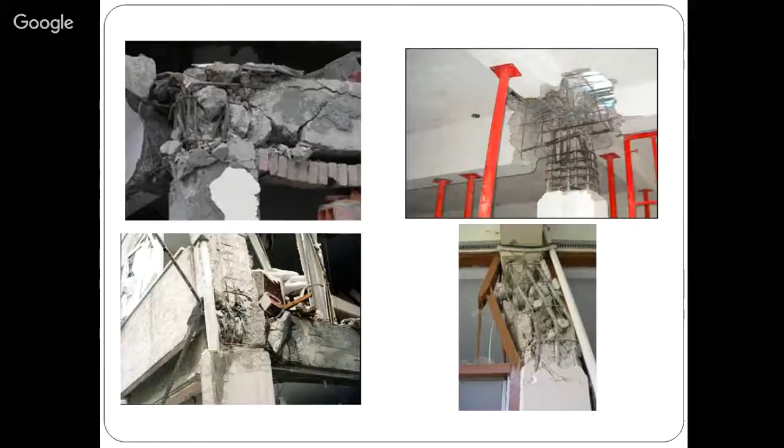So how do we construct earthquake resistant structures? We have to design our building with respect to IS 1893. We have to detail the structure with respect to IS 13920. So what does design and detailing mean? Designing means we have to follow the procedure defined in 1893, which includes the load cases with factor of safety. Whereas 13920, after designing the building with respect to 1893, you have to perfectly detail the building. We will discuss that in the later slides.

Stiffness irregularity means the first floor stiffness should be equal to the second floor, which is equal to the third floor, which is equal to the fourth floor.

When your stiffness is not going to be the same for the first floor, second floor, and third floor, that is generally referred to as stiffness irregularity. So what will happen when stiffness irregularity occurs?

For example, our ground story height is 10 meters, and the first story and second story heights are 6 meters each. So the ground story is going to be very slender as compared with the first and second story. In this case, the stiffness level of our ground story is very less compared to the first and second story. So the slenderness creates the weaker stiffness part of the building.

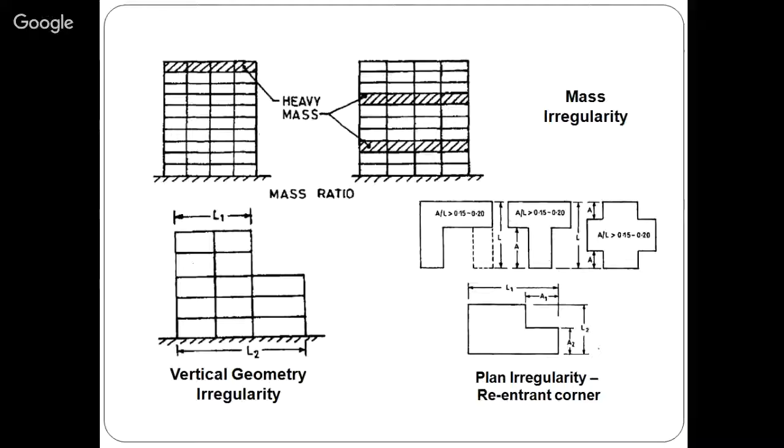Similarly, vertical geometry irregularity was already defined in the previous slides. Similarly, for plan irregularity, if you have any shape like T, L, plus, or C, it should have a separation joint at different levels and connections, so that the buildings will deform in an independent way.

Our earthquake resistant design philosophy starts from a concept called strong column, weak beam, which means column should be strong, beam should be weak. Our building is perfectly connected by column and beams. Can we imagine a building without column? No. But you can easily construct a beam, a horizontal beam in any direction. If you need a house, you need a column. So column is one of the prime important members of the building. If your column fails, the entire building will collapse.

As I already showed you in one image, every floor gets pancaked like a burger - that is because of column failure. So column should not fail. The reason we expect beam to fail, we're not really wanting the beam to fail, but the beam should allow the entire building to deform exactly at the junction point. That's why it's generally referred to as a weak beam.

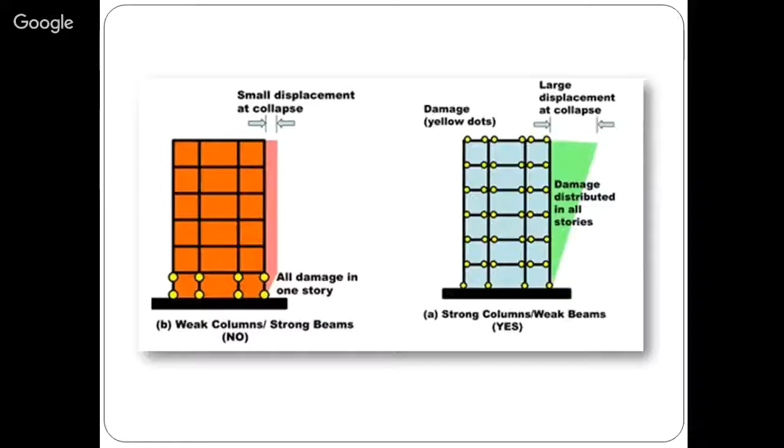So for this case, this is the column and this is the beam. When the building deforms, we expect this connection to deform. If the connection is not deforming, we can't expect ductile mechanism. In this case, we are connecting the beam like this - this is the column, this is the beam. What will happen if you connect the beam like this? When the entire building deforms, if the connection is not strong, the beam will fail. But we expect hinges to form in this particular connection, and if hinges form here, this will create huge stress transfer to the joint. So our beam connection should be very, very strong.

In this case, if I have a connection like this, it is weak. So what we have to do is make sure my beam is perfectly connected internally into the column. For example, this is reinforcement going into the column reinforcement like this - now it is already into the column. These are vertical reinforcement from the column, this is horizontal reinforcement from the beam. Now it should be perfectly anchored, like this. If it is not perfectly anchored, when large deformation occurs in the building, this will pull up.

This is generally referred to as reinforcement slip from the connections. If it is perfectly connected like this, even if you apply load like this, it won't come out. This is what is defined in the IS code. You can see in this picture, the vertical stands for column, the horizontal member is beam. The top reinforcement is going down, the bottom reinforcement is going up. This is to anchor the beam with the column, so that the beam will not fail during an earthquake, because we expect the plastic hinge formation exactly at the beam-column connections. If the beam fails, there is no plastic hinge formation, so the entire building will fail again.

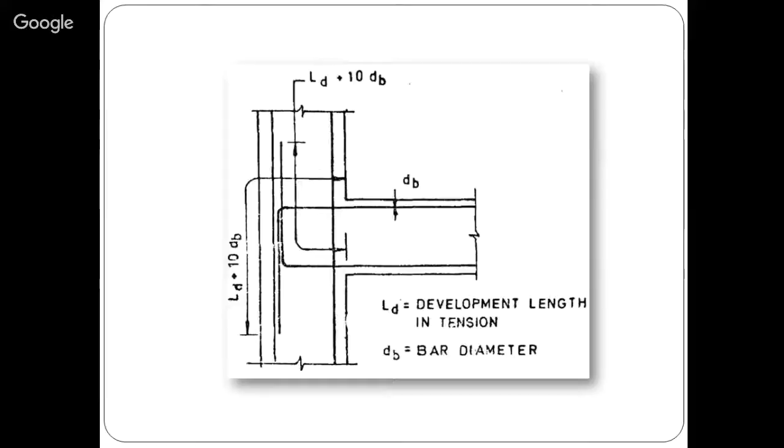When the member size is very, very large, we should not go for a single confinement. We should go for multiple stirrups like defined in the second one and the last one. When the cross-sectional size is more than 300 mm, we have to go for multiple stirrups - generally referred to as 2-legged, 3-legged, or 4-legged stirrups - confining in a multiple way. When you confine this way, you can easily protect any kind of structural member.

So these are the various codal procedures defined as per our Indian standard. When you follow all these procedures, you can easily construct a new house to be earthquake resistant.

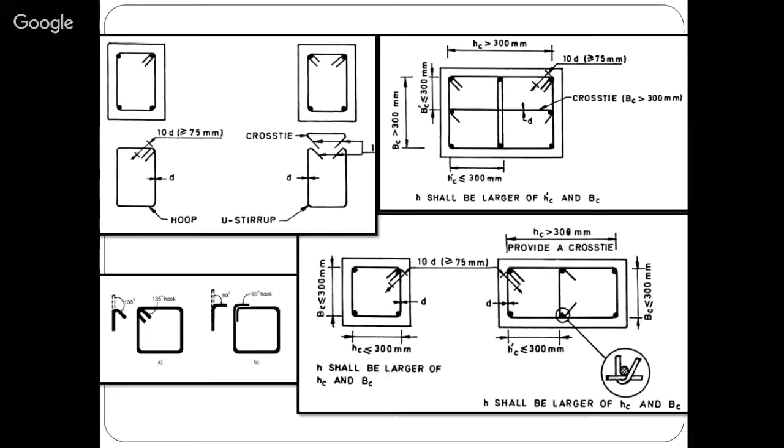But I can't construct a house myself. So what we do is hire a person from outside, a mason, and he executes the building - a bar bender. If you ask him to go for a 135-degree hook, he will tell you it will take too much time and it has no role, that it is completely useless. So what will you do? You will accept the 90-degree hooks so the work can be executed. Similarly, a mason will tell you that going for closer confinement creates congestion, so he can't do any proper concreting work.

So again we are compromising over there. When you go for any new construction, you can see they will raise the column up to the beam bottom. This is the beam, this is the column. So up to the beam bottom they will raise the column, and then when you are inserting the reinforcement of a beam, you can't go for a perfect anchorage. Again we are compromising here, so we can't provide perfect anchorage. So when you are doing all such mistakes, you can't resist any kind of earthquakes.

So these are the various procedures recommended in IS standard. You have to follow these standard methods. These are traditional or conventional methods. So what are the methods already we have in advanced stage? We are going to look into a small overview about the alternate constructions or advanced techniques to resist earthquakes.

So earthquake is, as I told you, an inertial force. It is creating ground motion, and that's why our building is deforming like this. So we have to do lot of procedures so that we can easily resist any earthquake.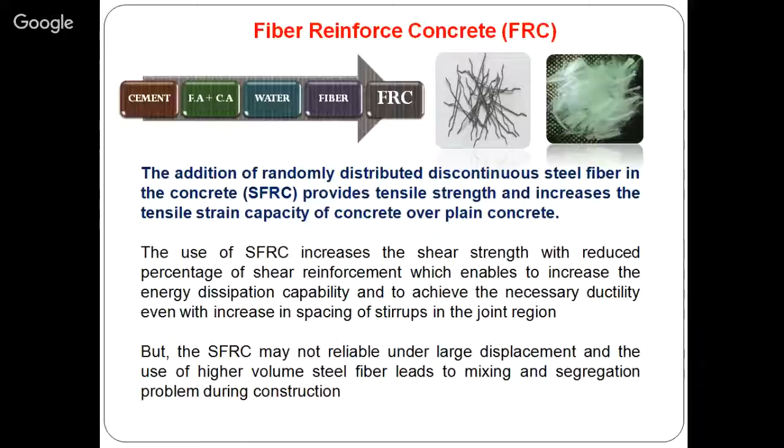So when it deforms in a flexural way, if you have fibers in the beam, it will perfectly bridge the cracks. See, this is the beam - when I'm applying load, there is a crack formation like this. In the conventional concrete, if the crack opens like this, what will happen? This crack will open and finally the beam will become two halves. When you have fibers, it will bridge the cracks. So if I have fiber between these two cracks, what will happen? It will not allow the crack to form or grow easily - it will bridge or stitch the cracks perfectly.

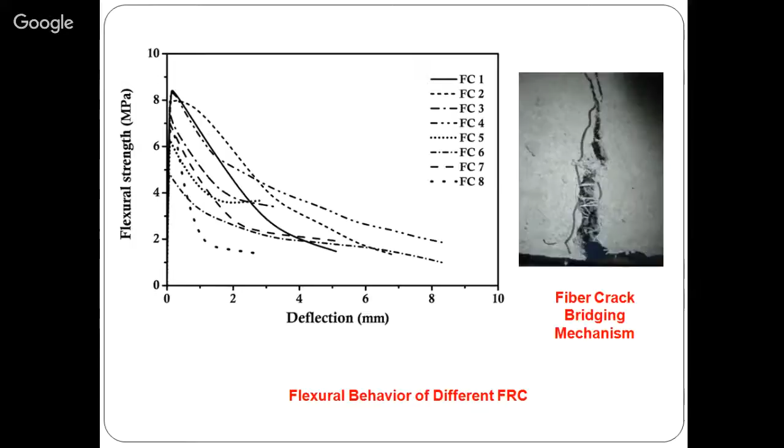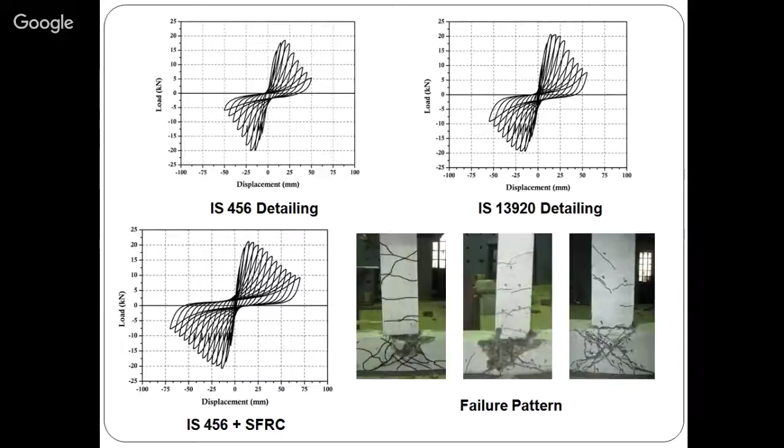Even with no earthquake resistant detailing, there is no spalling of concrete, but it has very good load resistance capacity and crack resistance capacity. There is no concrete spalling in the joint region. This is the advantage of steel fiber reinforced concrete.

Similarly, if you are expecting to construct a house in zone number 5 and the building height is very high, what will happen when you increase the building height? The building vibration is also going to be very high. So in this case, your conventional concrete method is not going to work. Even the fiber reinforced concrete is also not going to work.

In this case, what we can do is go for an advanced level, generally referred as fiber reinforced cementitious composite. I told you in conventional concrete we are using cement, coarse aggregate, fine aggregate, and water. In fiber reinforced concrete, we are adding fiber with the conventional concrete. Whereas in this case, there is no coarse aggregate and no fine aggregate.

In this case, we are adding cement, fine aggregate plus mineral admixtures. Mineral admixtures are nothing but silica fume, fly ash, or GGBS, anything—such waste material, very, very fine material that will fill the pores present between the sand. Water, admixtures, and fibers—that is defined as high performance fiber reinforced cementitious composites.

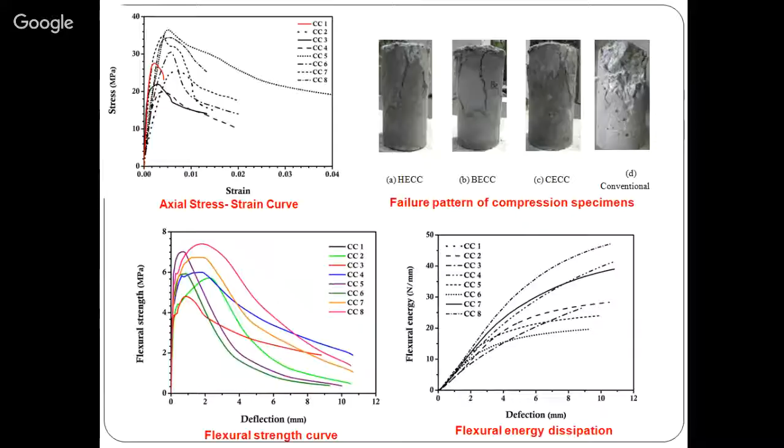It is not concrete, it is a cementitious composite. You can see this will work far better than steel fiber reinforced concrete or any fiber reinforced concrete. That's why these kinds of composites are recommended for buildings requiring large deformation. But this is not recommended for the entire building, it will cost you a lot. That's why it is recommended only in the joint region.

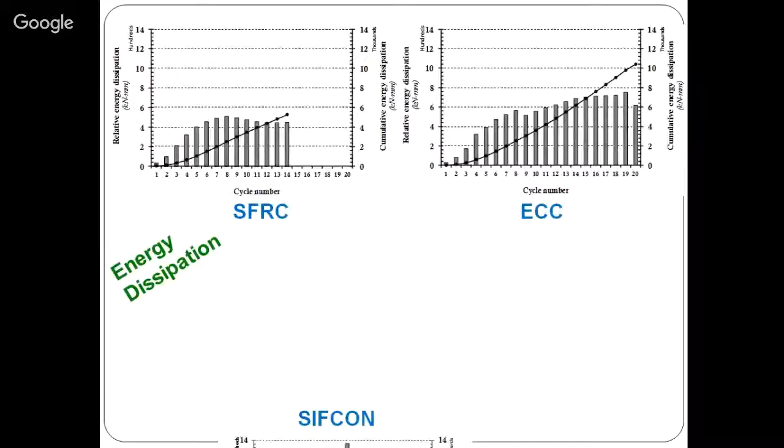So these are internal measures. When you come to external confinement, what does that mean? I told you for the existing building, how to save the building by using external measures for masonry structures. For RCC buildings, this is the only way we can improve the performance of the building, or we can save the building from lateral deformations.

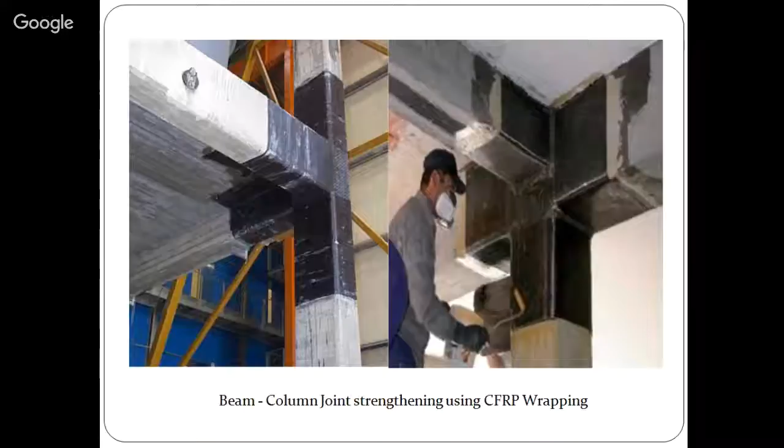This is generally referred to as external confinement using fiber reinforced polymer sheets. This is how they perfectly confine the external part of the building at different levels, exactly at the joint level. When you confine exactly in the external region, this will induce triaxial force. Internally, we expect two forces, and externally one force, making it a triaxial force. This triaxial force will perfectly confine the structure, especially the joint region, and can save the structure from collapse.

Another measure is base isolation. So what is base isolation? When you have base isolation, it is like the difference between traveling in a normal bus and a Volvo bus. So what is the difference between traveling in a normal bus and a Volvo bus? Anybody?

Comfort. How do you feel that? How do you feel the change in the comfort? Space, only space—seats are comfortable. Seats are comfortable. Next, what do you feel in an ordinary bus? What happens?

See, when you're traveling in a normal bus, and suppose the bus crosses a speed breaker, that's why we have shock absorbers at different levels. Anyhow, the shock absorber will dissipate the force. These forces transfer to the platform of the bus, and our seat is perfectly fixed with the platform, so you can feel the vibrations in the normal bus. In a Volvo, have you ever traveled in one? Yes. So if the Volvo bus crosses the speed breaker, how do you feel?

Wait, what's the difference? What kind of technology?

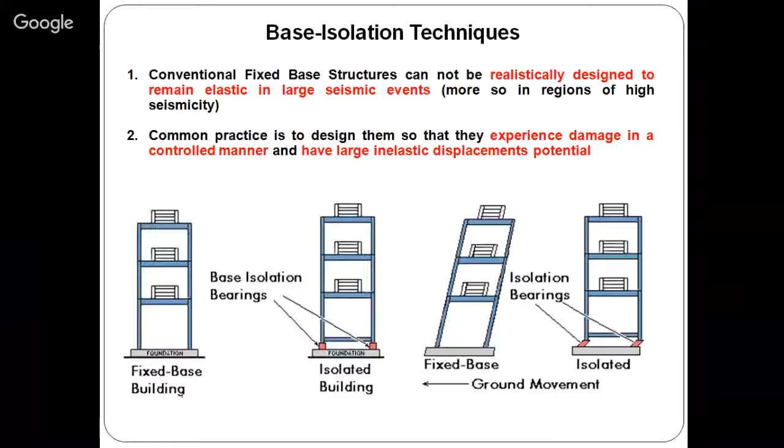You can see the first one is a fixed base building, where the top building is perfectly fixed with the foundation. The second one is isolated, where the entire building rests on the isolation. When you have a fixed base, the building behaves as defined in the third one. When you have an isolated base, the building behaves as defined in the fourth one. That is the difference in the deformation stage when you introduce the base isolation technique.

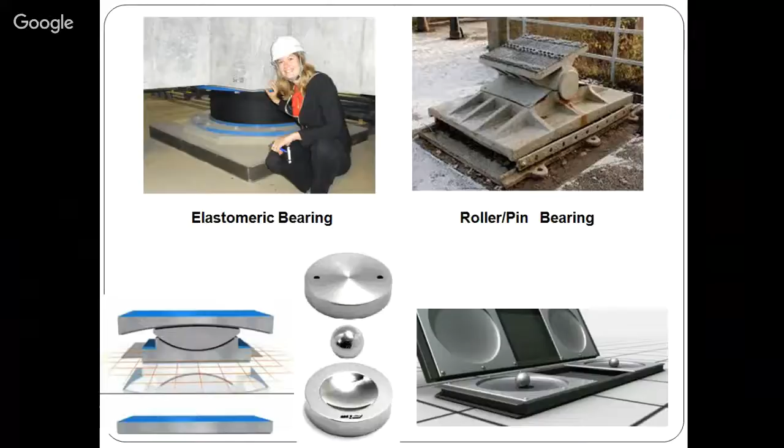This is how the bearing will allow the building to deform. You can see this is the deformed bearing.

This is the internal part of the elastomeric bearing. Internally, we have a lead core or some solid core, because the entire building rests on the bearing, so it should have the ability to resist compressive force. A rubber band alone would not resist this. That's why internally you can see the structure: a solid lead core supported by rubbers and steel plates. This takes the axial load as well as lateral deformations.

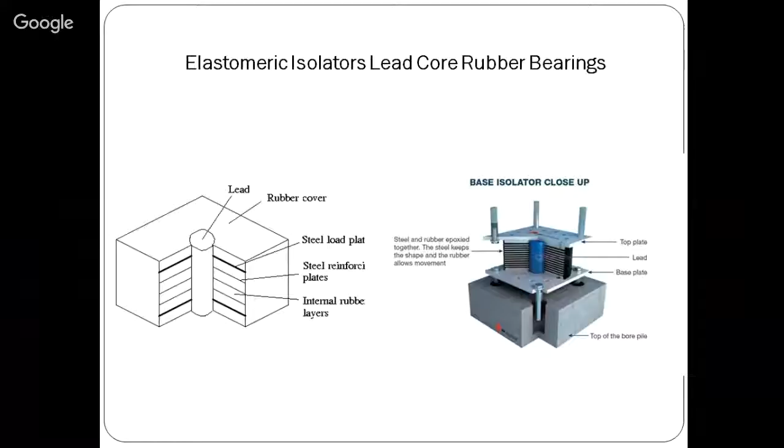This is another bearing, and this is also another bearing. The next one is the active damping system.

When constructing a building of 10 stories, it's okay, but when constructing buildings of 20, 30, 40, even 100 stories, we can't design by considering earthquake forces alone. For a 10-story building, there's no need to consider wind force separately when considering earthquake force, since earthquake force is larger than wind force up to a certain height. But for a 100-story building, it's very difficult to consider earthquake forces alone.

The deformation at different levels in a 100-story building means it's going to have 100 different mode shapes. The mode shape is nothing but the deformed shape of the building, with sinusoidal deformation at different levels. So it's very difficult to make such a building earthquake resistant.

You may ask, why can't we go for a damping system? We can, but if your building is very slender, damping alone won't support it much. That's why we have to go for an active damping system, not base isolation. How does the active damping system help resist lateral deformation? Let's see in a video.

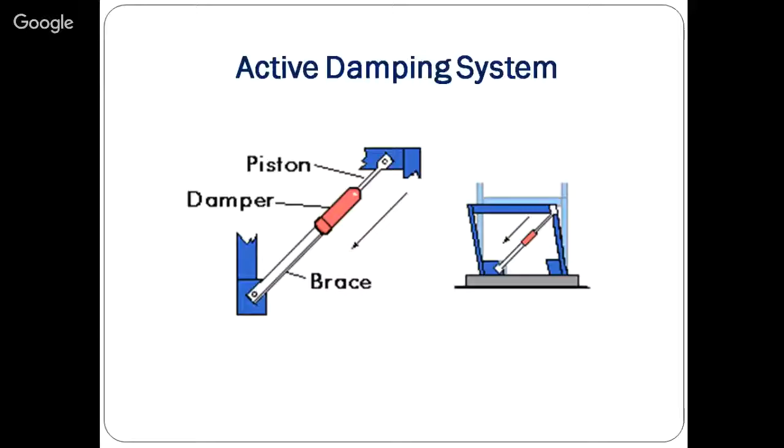This can be easily implemented. You can easily fix this damping system anywhere in the building because it is an external part, not an internal part. You have to connect the link between column and beam as defined in this picture.

This particular damper has many types, like viscous damper, friction damper. Based on the requirement of the building, we have to choose the damper and the location of connections. It can be connected in L shape, X shape, or any shape as defined in this picture.

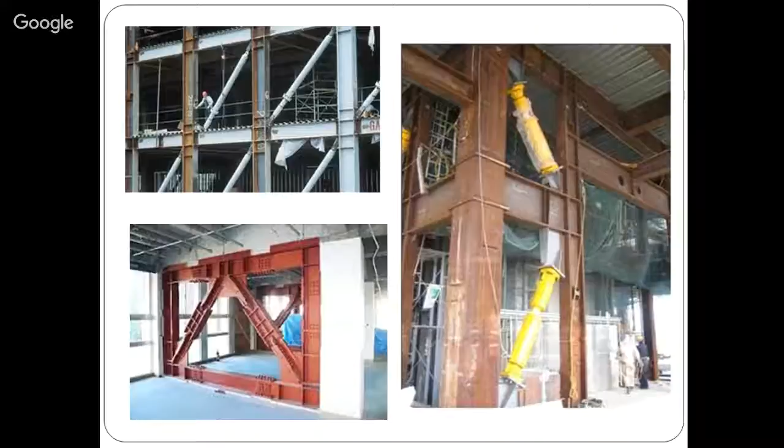So this is a perfect example of how they have connected the damping system in an existing building. This is how the damping system will help you reduce deformation, or resist any deformation, during an earthquake. Thank you.

Any questions? CV Raman College. Any questions? Any questions?